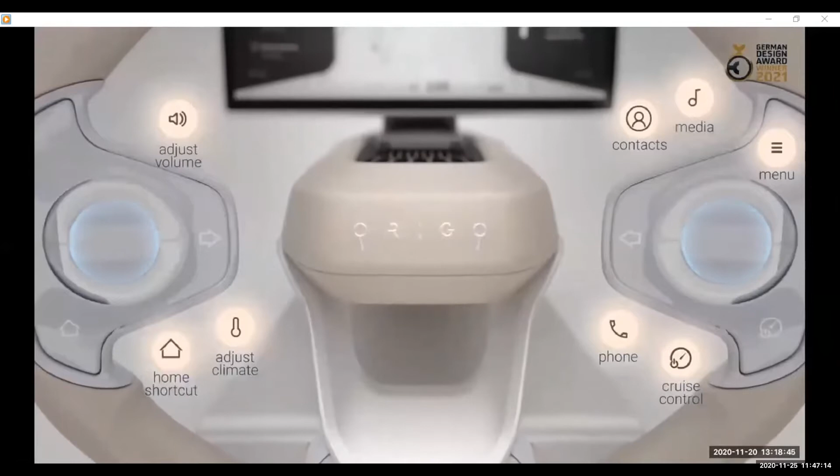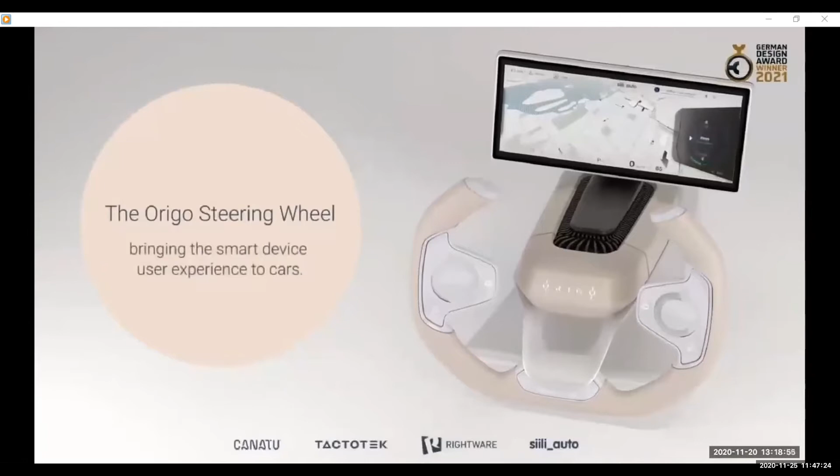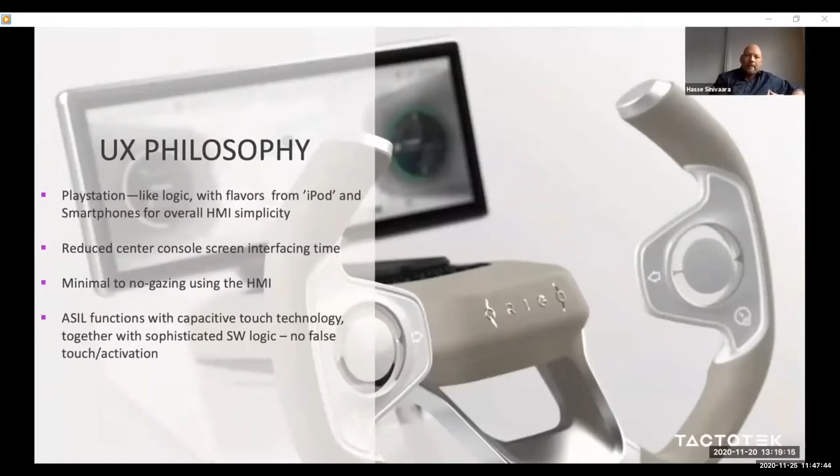So that's a sneak peek of the concept itself, and now I'm going to talk through some of the UX philosophies we had in the background to basically define how the HMI and the lighting architecture is going to be designed in the steering wheel itself, as well as within the GUI.

So first, as everybody knows, the trend in automotive is of course media screens and specifically touchscreens. So center consoles are coming with touchscreen interfaces, and the displays are basically taking over the mechanical, electromechanical switching environment in that sense.

The basic philosophy we thought of is how to reduce the media screen interaction time for the driver, so that there's minimal distraction for the driver. They can basically concentrate on driving, but still operate the system in the most fluent way.

We also thought, let's make it very simplistic. Let's say Scandinavian style is very simple. So our logic HMI is very simple in design. There's not many logic buttons, so you don't have to really learn a majority of, let's say, tens of buttons.

The background was also that there are a few billion users around the world who are accustomed to touchscreen operations - merely gesture and tap-based operation of smartphones, tablets, media devices, even laptops and TVs. People know how to use them, and this is also the driver behind it. So our main focus point was to create a gesture-based user interface.

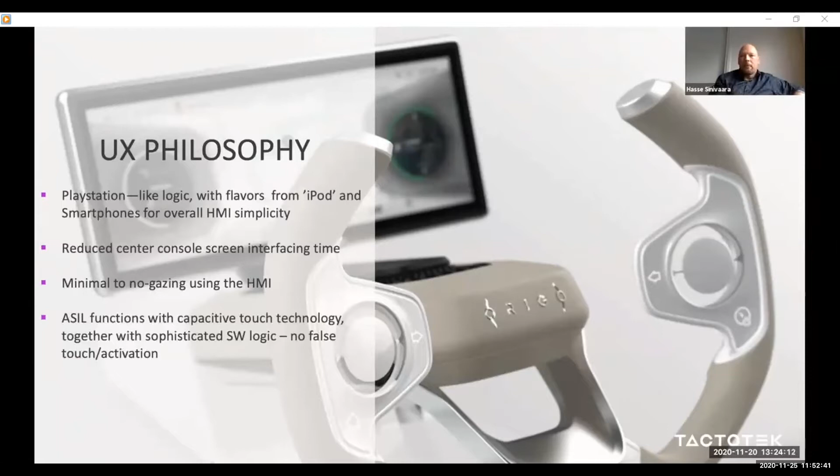A little bit about the 3-dimensional HMI design itself. As you can see, we have a very ultra thin structure with the light element with IMSE, the transparent part, which also acts as a carrier for the capacitive-based touch film that is bonded over the part. We wanted to create a fully 3-dimensional HMI system with integrated illumination, to showcase how thin a structure we can make with all this sophisticated functionality, from the touch operation point of view, but also the lighting point of view.

I'm 99.9% sure there is no competitor solution which can integrate in this form factor. For the scroll wheel, we have a 3-dimensional concave shape to guide the finger, whether it's a thumb or otherwise operated. And the logic buttons, the turn signals, home and cruise control, are in their own separated recess areas, to minimize false touch operation, placed in areas that you intentionally have to move your fingers around to activate them. So this was a combination of how the UX design converts into the surface modeling.

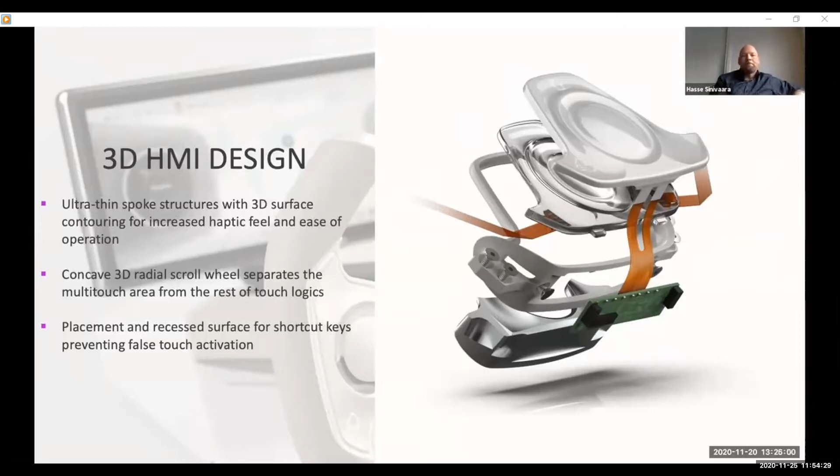A bit about the applications and some unique aspects of them.

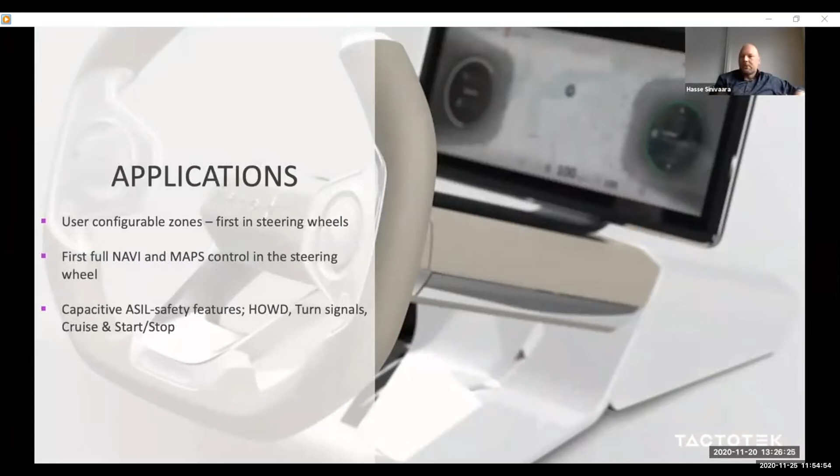The left and right zones, as you can see in the pictures, are actually fully configurable from a multi-touch standpoint. Of course the turn signals, home and cruise control are positioned as functional static logic buttons, which by printing them in different ways, you can place in a different position, change the graphics, change the coloring. So one of the benefits of screen printing technology is we can maintain the same three-dimensional form while adding or removing functions. It's technically a printing system.

But user configurability comes into play so that we can actually swap the left and right side functional logic at the software level. Those circular areas are multi-touch areas, whether you operate them in a radial fashion or swipe fashion, and we can change the sides of the left functions to the right and vice versa. Again, I'm 99% sure there's no viable implementation today that can do this.

One of the unique aspects of the design itself, from the applications standpoint - we believe this is the first time navigation and map controls are brought in this level directly into the steering wheel. There's a full navigation with character input as well on the circular area.

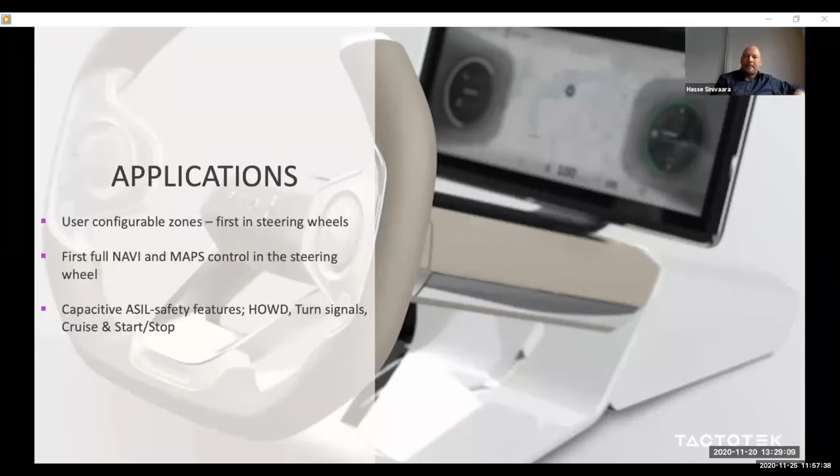Then shortly, the illumination architecture itself. As you can see, we have those transparent glow rings, which are pretty cool looking, but they have a specific function as well - we consolidate informative warnings and decorative lighting into those rings. The idea was to test whether we can consolidate different warning signs, signals, and informative signals into light, from a perspective into the steering wheel, which opens up the possibility that it's primarily in front of you almost.

It engages your peripheral vision, so you can concentrate on driving on the street in front of you, and those glow windows and surrounding areas can be used as a visual output for any kind of colored indication tones in the vehicle. So you don't have to look for them - it's a very convenient location in your field of vision while driving.

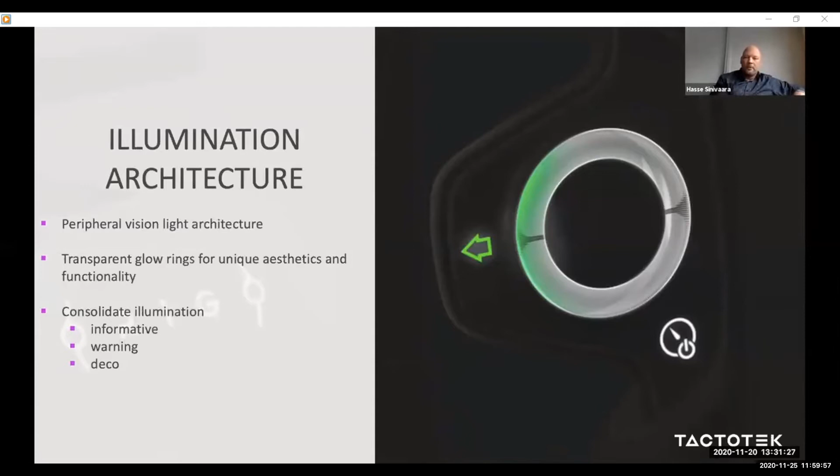Hope you enjoyed. The last slide after this one is, I believe, from last week, from the software integration - a very short video of the actual Origo, and this particular video shows a little bit of the light performance in daylight conditions. So Tua, if you click play, let's see.

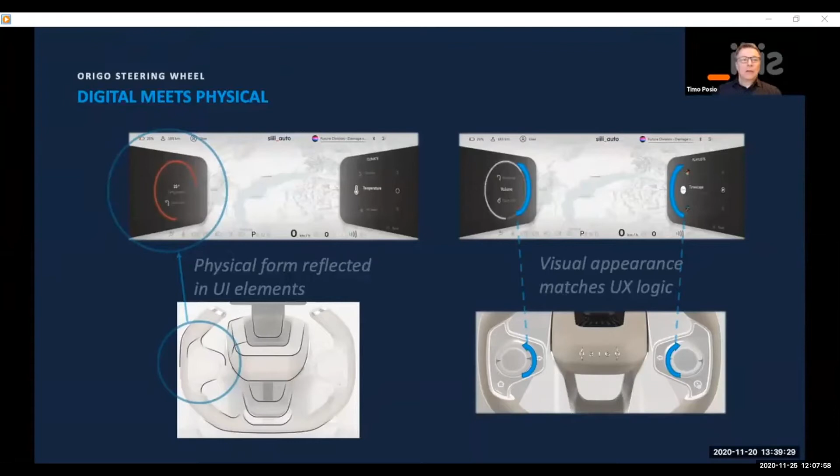Then, as Hasse already mentioned, one of the unique things and unique ways is how the navigation and maps are controlled with the Origo steering wheel.

For example, let's take the zooming. Zooming happens with both thumbs. You put your thumbs to the slide area, then swipe out or swipe in with both thumbs, and the map is zoomed as well. So you don't need to take your hands off the steering wheel to zoom and operate the map.

The other unique thing with touch areas is that you can type the destination. If you are right-handed, you swipe with your thumb on the right-hand side, writing letters, and it recognizes what you need to write. So you don't need to go to the center screen and start typing letters there—you can operate everything on the steering wheel.

Here also the two-hand controls come in: in navigation and selecting forms, you select the primary functionality on the right-hand side, and then on the left-hand side you do the additional controls like searching results or selecting the destination and so forth. Those are some of the key drivers and areas when it comes to the user interface design.

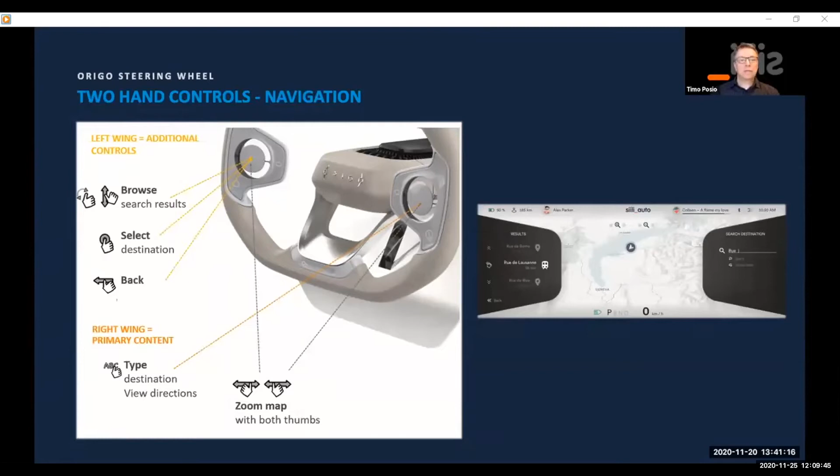If you go to the actual implementation part, we have basically an automotive grade implementation of the user interface software. As Hasse mentioned, there are standard cluster elements, ADAS things and so forth already included in the design and implementation. The software platform we used in Origo is the widely used Kanzi platform by Rightware—they're using Kanzi UI, Kanzi Connect, and also Kanzi Maps for the maps functionality. All of this runs on automotive grade NXP IMX8 hardware.

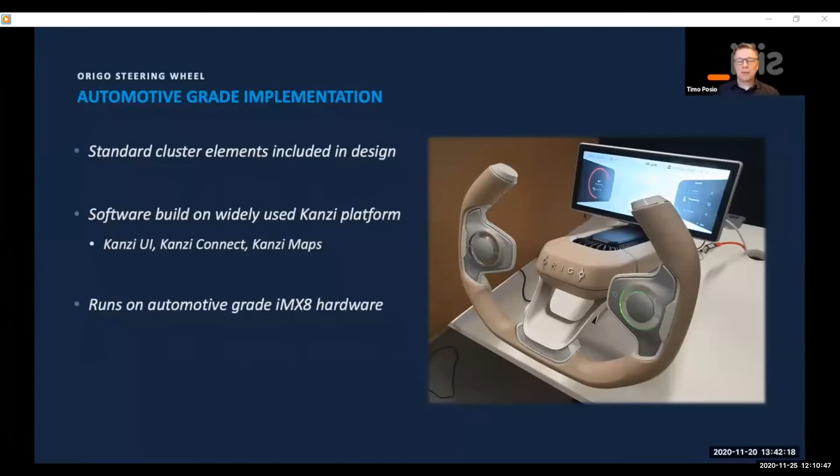So this is a ready-made automotive grade implementation. Here's also one of the pictures of the actual steering wheel from when we had, as Hasse mentioned, software integration and final testing around last week. Okay, that's it about the Origo steering wheel and user interface.

If you think about IMSE technology as an HMI enabler, what we're all driving toward is having an intuitive and safe HMI. One key target for every OEM is reducing driver distraction, so that in any situation the driver can focus as fully as possible on the street, traffic, and other passengers or pedestrians.

The challenge nowadays is that traditional touch displays actually cause distraction, because to operate them you need to turn almost your full attention to see them. Especially with navigation, when you need to type in the destination while the car is moving, you need to reach out and type the letters. It's really tedious, and you need to focus closely to get the right address written down. That's clearly a challenge.